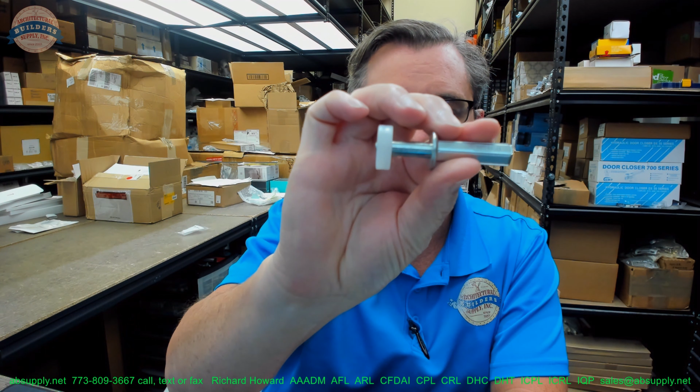In this video, I bring you a closer look at the Stanley number BF30352C. I believe that's the right part number. Let's take a closer look. Yeah, it's BF30-35, and it is a 2C, meaning it is zinc. Okay, zinc-plated steel. This is a typical roller that's going to be used in the leading panel of a bifold.

So if you had a 2-panel bifold door, you would have one of these installed. You'd have one of these installed for every pair of 2 folding panels. So if you had a 4070 with 2 sets of those, you'd have 2 of these. Not uncommon to replace these. It is really that leading edge that seems to take all the abuse when it comes to the doors being opened and closed countless times, or when something is in the way and the door is closed.

This top roller really is the part that fatigues first, but this is from a very low cost economy grade kit, even though the Stanley kit is very good. I can't imagine the millions of these that have been manufactured over the years. Let's take some dimensional properties of the guide wheel. Overall length, about 2.5. It is spring-loaded. That's how you install it, or remove it, I should say. Down to about 1 15/16, 1 7/8 perhaps.

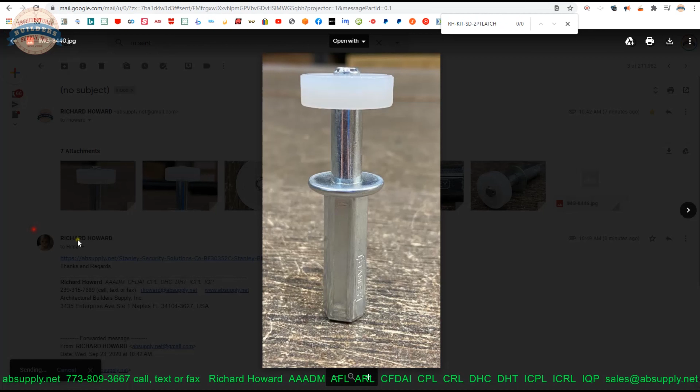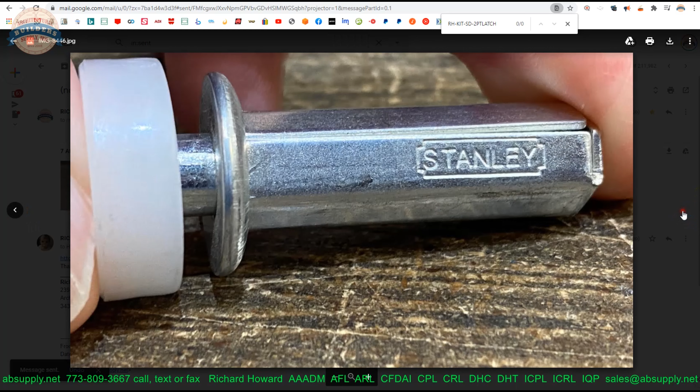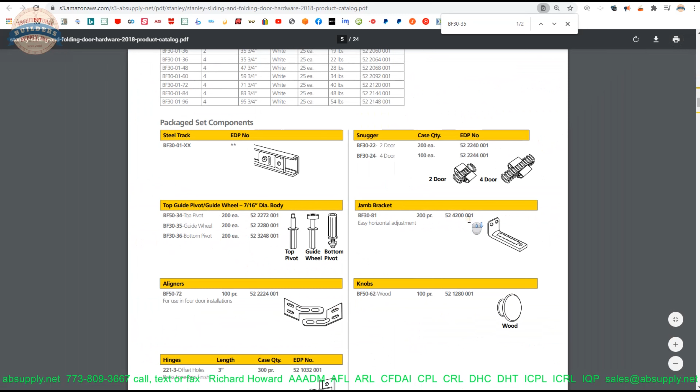Here is the item that we are looking at. We have some images of the item that we can take a look at, linked down below. General image, a side view, a top view, bottom view, the Stanley logo stamped onto the material, the wheel, showing it compressed. There is also a link to the cut sheet that's here. It's a single-page document from the full catalog that shows this item along with its sister products when it comes to this 30-pound rated bifold material. The entire kit, dependent on the length, the bottom pivot, the top pivot, and the wheel guide.

This is all very common to replace. These are called bifold door aligners. You would only use them when you had pairs of panels hinged together. So if you had 4 individual panels is the only time that you would use these. And they serve to draw the inner panels together nice and tight so that they're flush with each other. This is a bifold door hinge, also known as a non-mortise hinge. This will hinge your panels together.

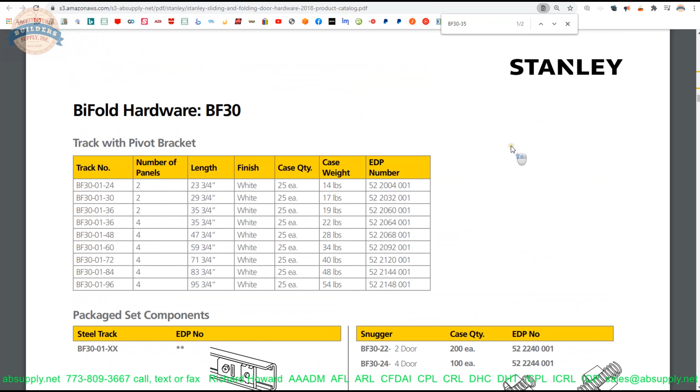This would be called a snubber, is what I would call it. I don't know that Stanley calls it a snubber, but snubber is a technical term from Lawrence Brothers when they were in business and manufactured sliding hardware. That allows you to push the doors closed and leave some tension on the door so that they stay in the closed position. This would be used for a pair, again, a 4-door opening.

The jamb bracket is what the bottom pivot sits into. These teeth will fit into here, and then you can rotate that clockwise or counterclockwise to drive the doors up or down. And then lastly, a knob. Of course, you can use any knob that you like.

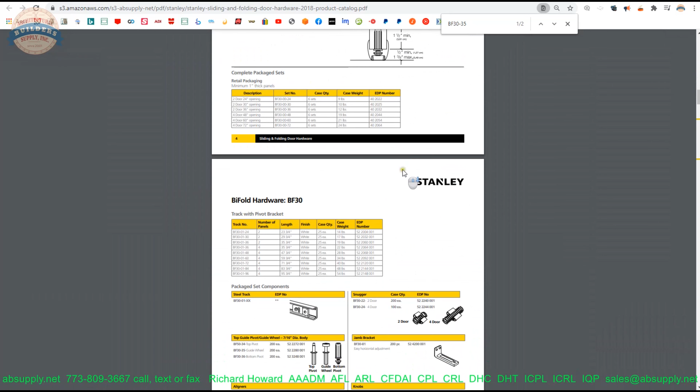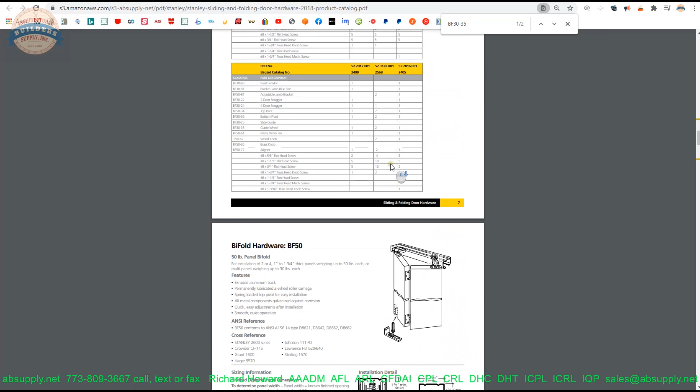There's also a link below this video to the product catalog. This is all things sliding and folding door hardware from Stanley, and their name has been synonymous with this material for decades. If you're buying prepackaged bifold doors from a home center, from a lumber yard, a millworker, it's very likely that they're going to have Stanley hardware packaged in those boxes to begin with. People will often call and say, yeah, I know I can buy the Stanley that comes with it, but I need upgraded material. Well, Stanley offers that as well.

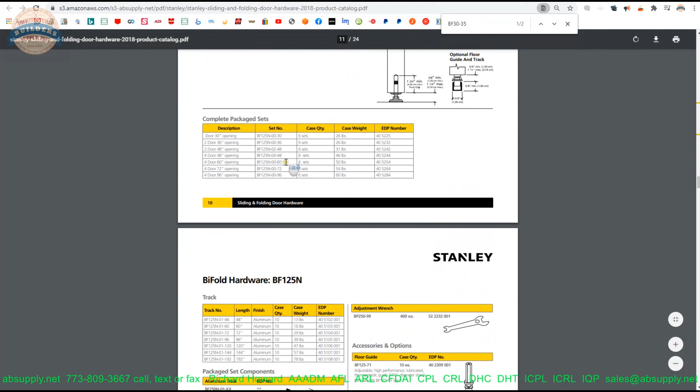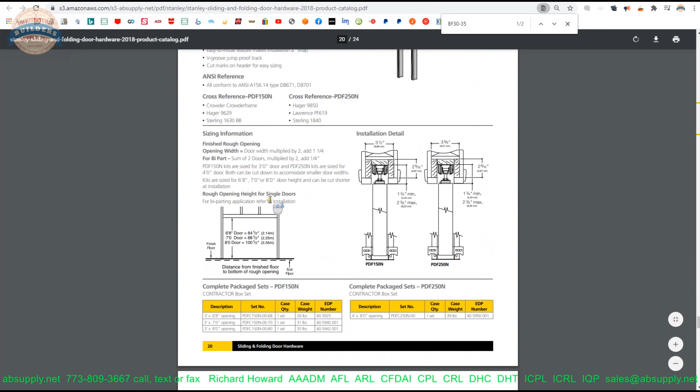They have some 125-pound rated material that you can easily use as a bifold as well. And if your application permits it, I would suggest, again, the upgrade. Bypass material, its constituent components are there as well. Heavier duty material, 250-pound. So don't let the name Stanley be synonymous with that low weight 30-pound capacity. They can get you heavier material as well, as evidenced by this catalog. Pocket door frames are here. All the track hangers necessary for that as well.